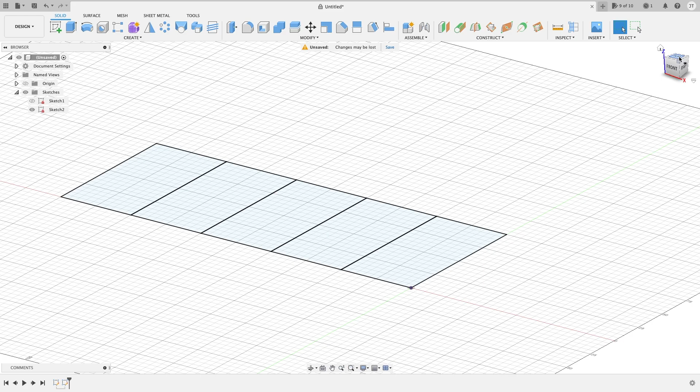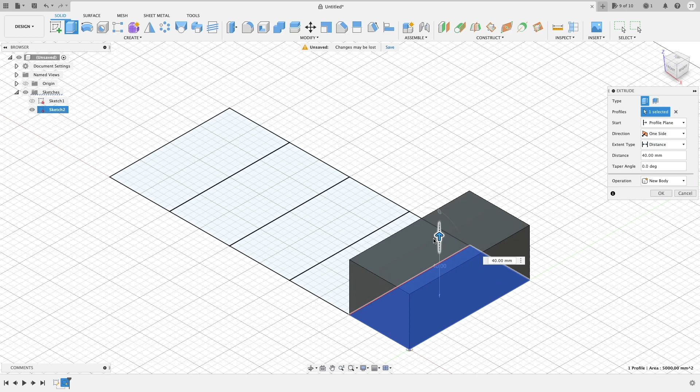As you can see, we're at our side view here on our plane, our X and Y plane. Let's say we want to make a set of stairs. I can click into this little square or rectangle here and it highlights it blue. This is a closed boundary, so whatever I click inside this boundary, I can select and extrude it by itself.

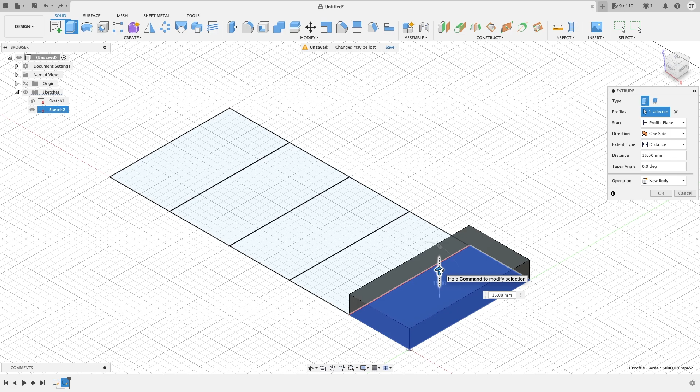Let's say here we want to make a set of stairs. As we have done here, we have put in our X and Y plane. We would select a rectangle here, hit the E key for extrude, or go up here and hit extrude. Let's say we want to extrude it by 20 millimeters. So we hit 20 millimeters and it will extrude.

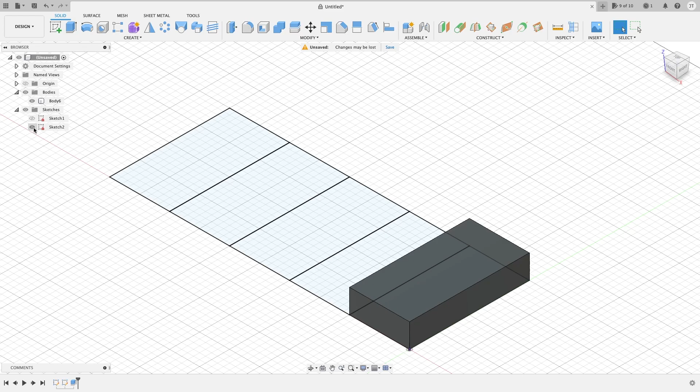Now, whenever you extrude something the first time, it might get rid of your original sketch. If it gets rid of your sketch and there's more that you want to extrude, you can go over to your sketch part here and highlight this little eye icon, and it will bring up all of your sketches. So we'll go ahead and extrude this one by 40, so it's 2 times the size.

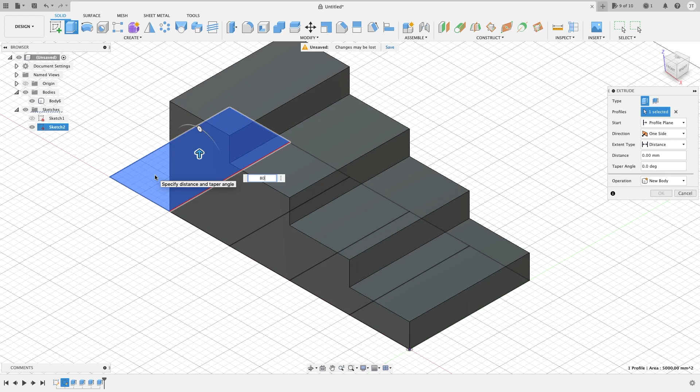Then we'll go to 60, then 80, and then we'll go to 100. We'll extrude to 100, and now you have a set of stairs. Look at that. That was a lot of work though, right? We had to go to each one and individually extrude each one. Now we can do this in a way simpler way.

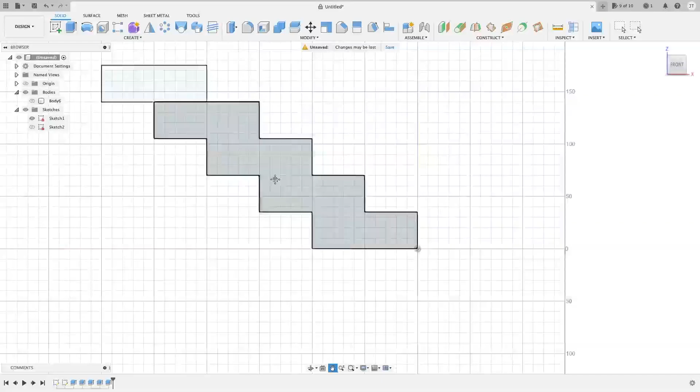Instead of going on our XY plane, I went on our front view. If we highlight our front view and go over to a pre-made 2D sketch that I did, you can see I have made some stairs from this direction. I already planned out all of the height that I wanted from each one, and we'll just go ahead and highlight our main ones here.

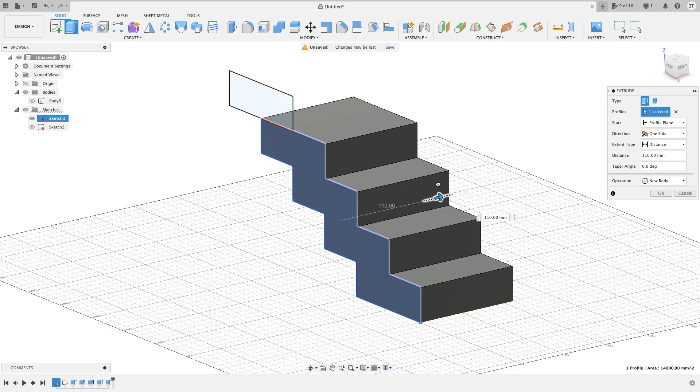As we extrude, we can specify how much we want. We hit enter, and boom, we have made stairs a lot faster and with a lot less work than the original way we did it.

We can also highlight our sketch here again. Let's say we want to extend this part out a little further. We can do that. Now, when you extrude something and add on to something, there is this box over here: Operation, Join. If I were to leave this highlighted as Join, it would make this tied to the solid we just extruded.

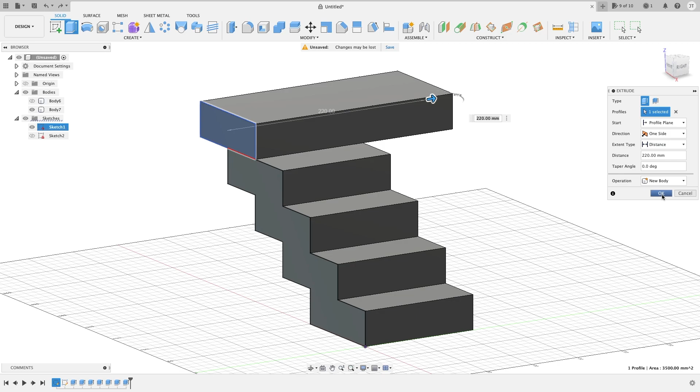So I'll show you this. If you were to highlight this, it would highlight the whole thing because it's all one object. Now if we were to extrude this, we'll go to our box here and select something called a new body. Hit OK. Once we highlight this, the whole thing is not selected because these are two separate entities.

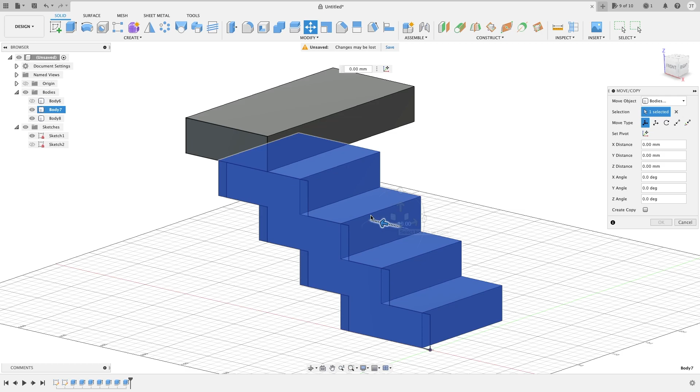They're two different solids, so they're not tied together. If you wanted to later on, you could move this piece and it would not be tied to the stair. But with Join, if you were to highlight this, it would be all one thing.

So that is one very cool feature on how to extrude things. Like I said, planning out how you're going to make something can cut you down a lot of time.

Also over here on our sketch plan, as you can see these little locks here, that means your sketch is fully constrained, and you really want to shoot for all of your sketches to look like that. Otherwise it'll be a little square with a pencil in it. So I would encourage you to very much try your best to constrain everything.

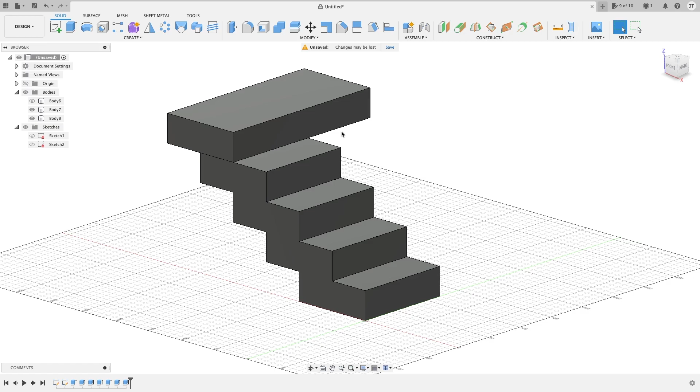Another nice little feature you can do with an extrude once you get into this is you can do different types of extrusions. You can do a directional extrusion — click on your extrusion here and it only goes one direction. You can also go down into a two-side option.

You can extrude this to a certain length that you want, and bring this side out to a certain length that you want. You can also do what is known as a symmetric extrusion.

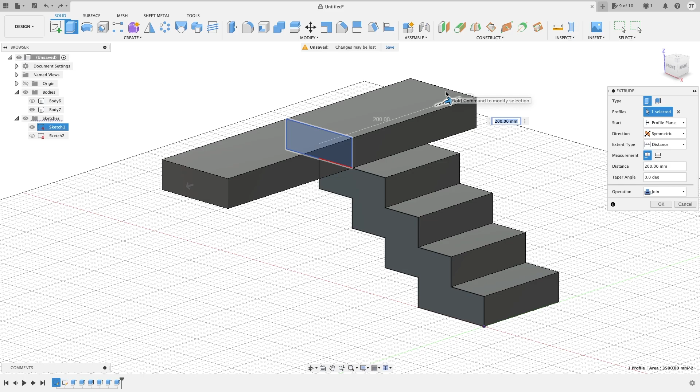If you move one side, it moves the other side in equal length to it. So if you do 200 millimeters this way, it's going to go 200 millimeters this way. It would then be 400 millimeters overall.

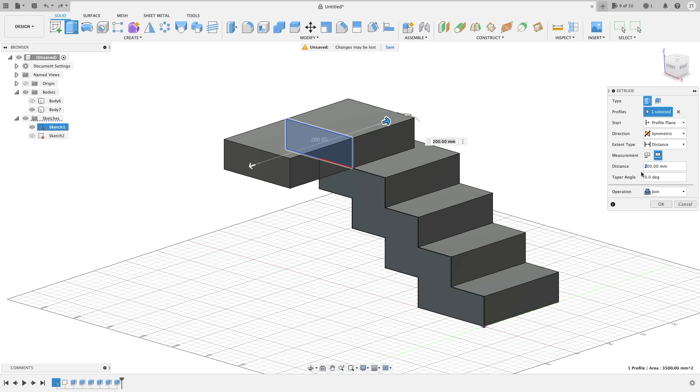You could also differentiate it, so if you wanted it to be 200 millimeters overall length, you could specify that. If you want it to be 400, you can go in and change this value here to 400, and you could essentially do it that way.

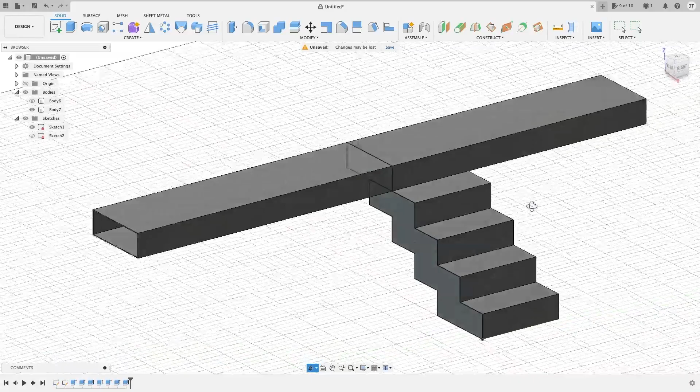You can do a thin extrude, which would hollow out your extrusion — it would not be a solid object. I believe that kind of sums up all the extrusion tools that you can use. It is very neat because you go from your 2D sketches right into your 3D solids.

So it's quite an exciting thing, and we're going to get more into the tools that you can manipulate these extrusions with. Next video, we're going to work on revolves, and I hope to see you then.